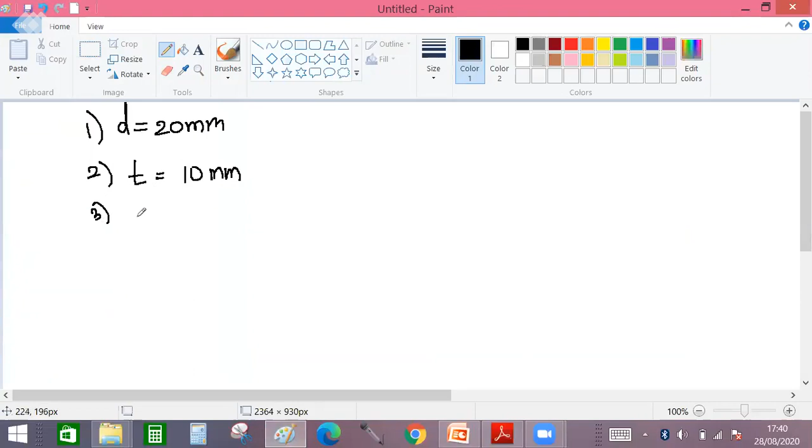So the third given is FUB equal to 400 MPa. Why is it so? The grade of the bolt is 4.6 grade, that's why we have taken it as 400.

At 50 mm pitch, the pitch given is 50 mm. Now here in the problem, pitch is given to you as 50 mm. If it is not given, how it is assumed, or sometimes we have to calculate it, will be clarified after certain problems. So here the pitch is given as 50 mm, so the next given is pitch equal to 50 mm.

Then the next one is to calculate the efficiency of the joint, with Fe 410 grade of plate. This plate that you are joining has grade 410, so FU, that is the ultimate stress of the plates being connected, is 410. So the next given is FU equal to 410 MPa.

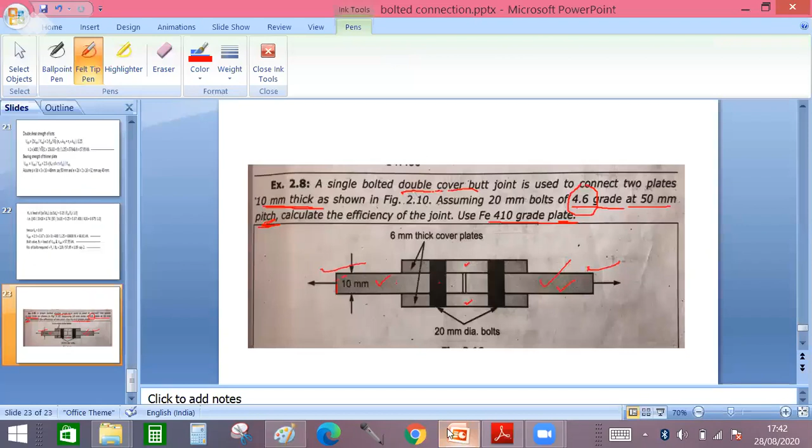Okay, what do we have to calculate? Efficiency of the joint. Any more? See here in the diagram, it is shown the thickness of cover plate is 6 mm. This is very important.

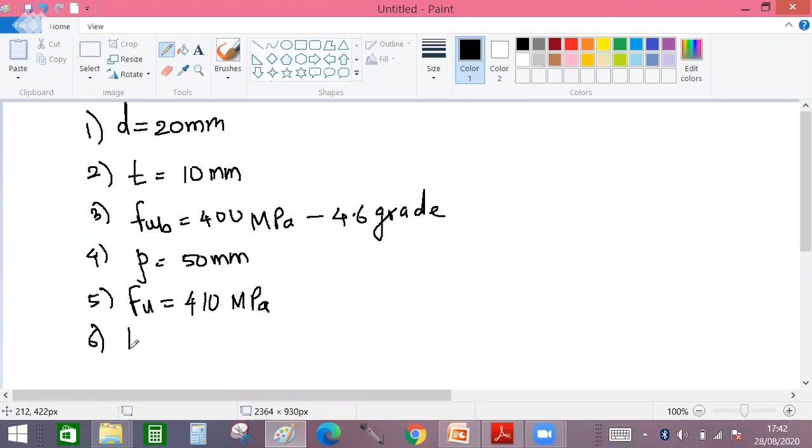How it is, I will explain later on with the steps. Thickness of the cover plate is 6 mm. The member carrying force, here it is 10 mm thick, so the member joining has a minimum thickness of 10 mm. And the cover plates have 6 mm each, there are two cover plates having 6 mm thickness. So the next given is thickness of cover plate is 6 mm, and there are two such cover plates.

Because it is a double cover, thickness of cover plate is 6 mm, two cover plates are there. So this is overall about the given problem. This is the first plate, this is the second plate, connected with bolts of 20 mm diameter using two cover plates having 6 mm thickness each, with the help of 4.6 grade bolts at a pitch of 50 mm.

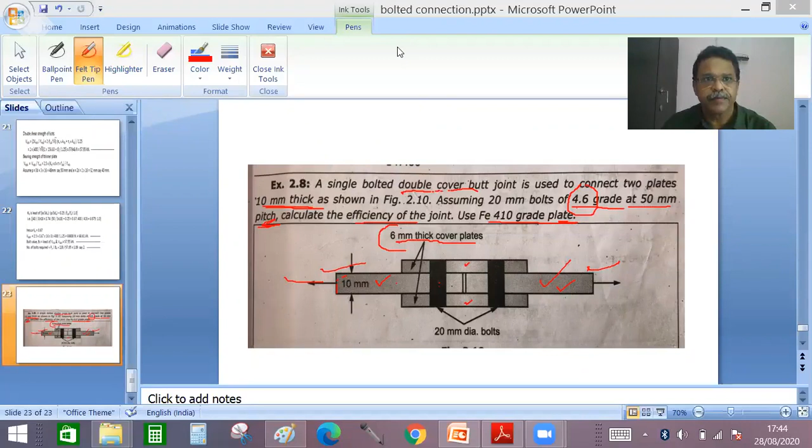These are the givens. D is equal to 20 mm, T is equal to 10 mm, FUB is 400, cover plates 6 mm thickness each, FU 410.

Okay, now let's start with the solution of the problem.

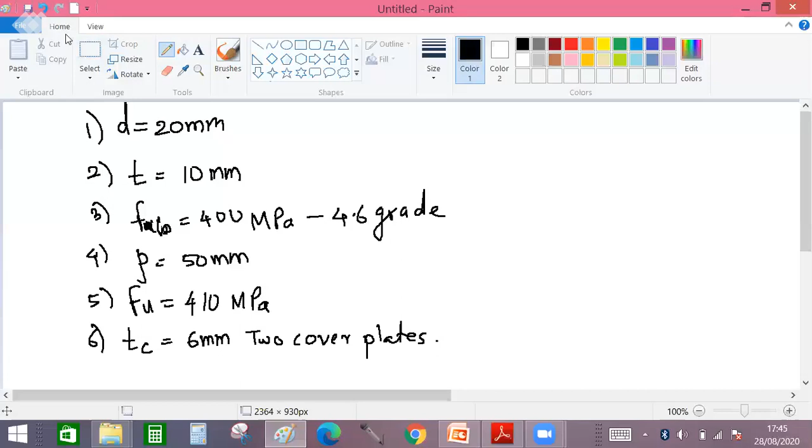So what is the strength of joint? In yesterday's lecture we completed the strength of joint. Let me summarize. The joint consists of two plates. This is the first plate, and this is the second plate, and there will be the bolt.

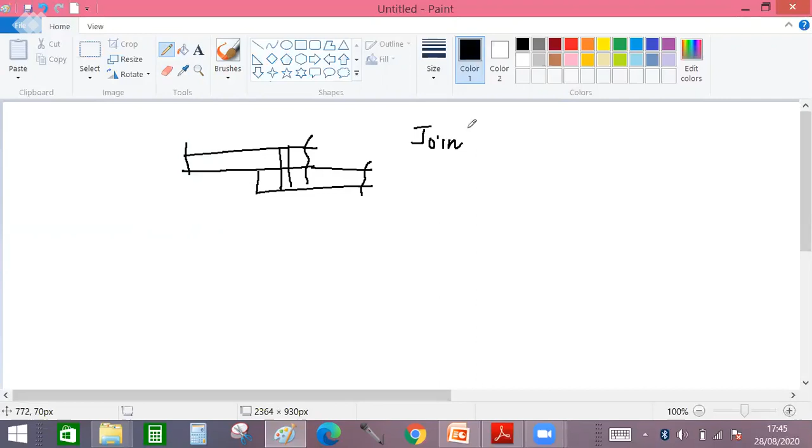So the joint has two main constituents: first is bolt and second is plates. So the joint will fail either by failure of bolt or by failure of plate. Meaning this bolt may fail, or this one plate may fail. Any one can happen.

Which will happen? Whichever is weak, that will happen. So we have to calculate which is the weak one, either bolt is weak or plate is weak. So considering the bolt, we have to calculate first the value of bolt, that is VDSB.

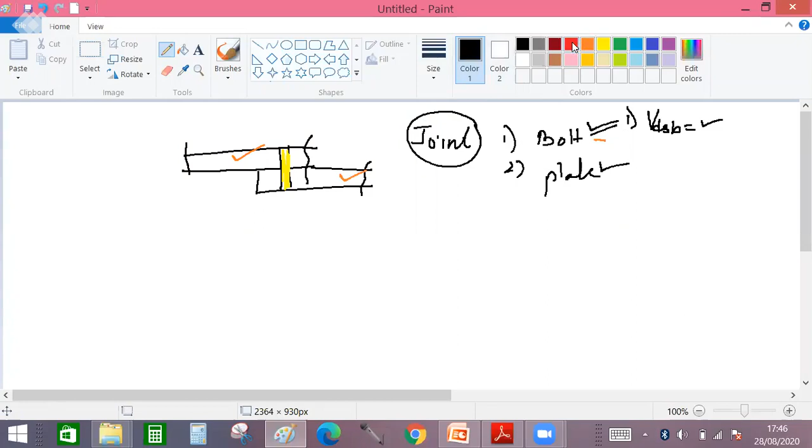At how much load it will fail in horizontal shear plane. Here it is, this is called the shear plane. Due to this force and this force, this bolt will fail at this plane, and that is called shear failure, and its strength is VDSB. So we have to calculate VDSB first.

Then the second one, that is VDPB. That is, the bolt will fail either in vertical plane like this. I will show by another color. Here it is, in vertical plane.

So only the part of the single plate can fail here. So this is the failure of bearing, that is VDPB. So the bolt may fail either in shear horizontally or in bearing vertically along one of the planes in the plate. So these are the two possibilities of failure of bolt.

So to keep the joint intact without failure, you should not allow either of these failures of bolt. Meaning you should not place the load more than the capacity of the bolt, to keep the joint intact without failure.

Now the second one, that is the plate, third one, that is TDN or TDG, doesn't matter. So you have to calculate the strength of plate. These three parts we covered yesterday along with the formula. So calculate these three parts of this joint, then you will realize what is the strength of the joint.

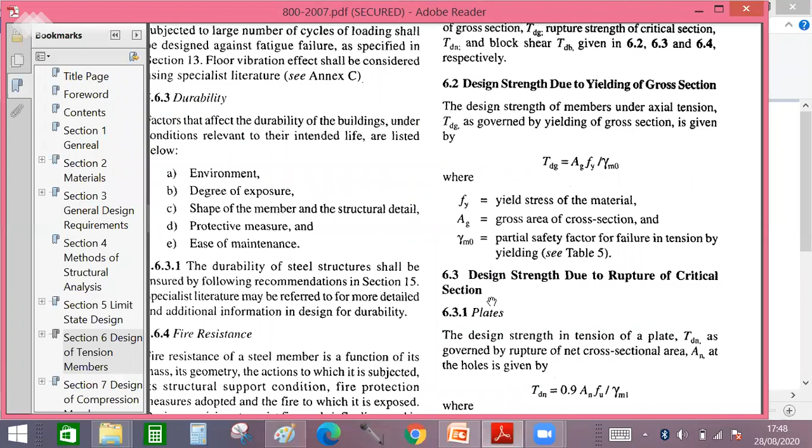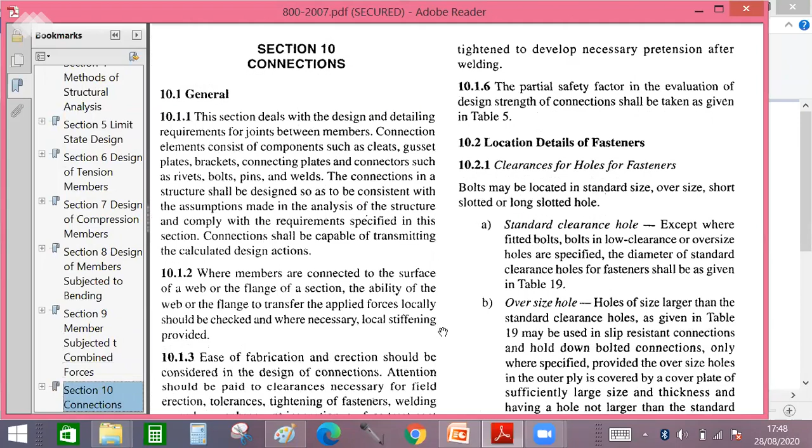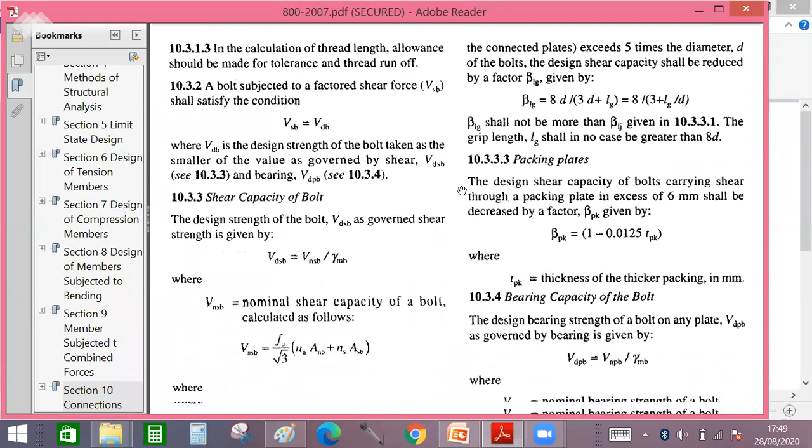Here it is, the connection to be taken. Okay, bearing capacity of the bolt. Here it is. Bearing capacity of the bolt, VDPB.

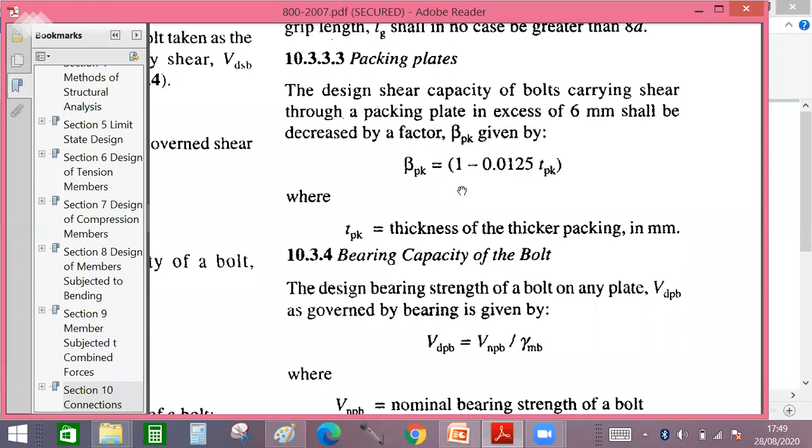Look carefully, it is very important. Many books have made this mistake, many solutions also have this mistake. I will show you where it is, but what is correct. Suppose you are referring to 10 solutions, out of that 6 solutions have taken it correctly, one or two solutions have taken it wrong about the thickness. I will show you somewhere, see here.

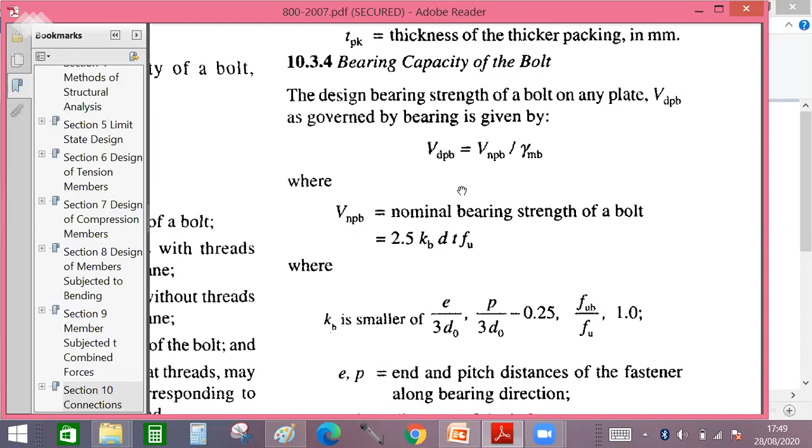Here it is, 2.5 kb d t Fu, that is the formula we are using.

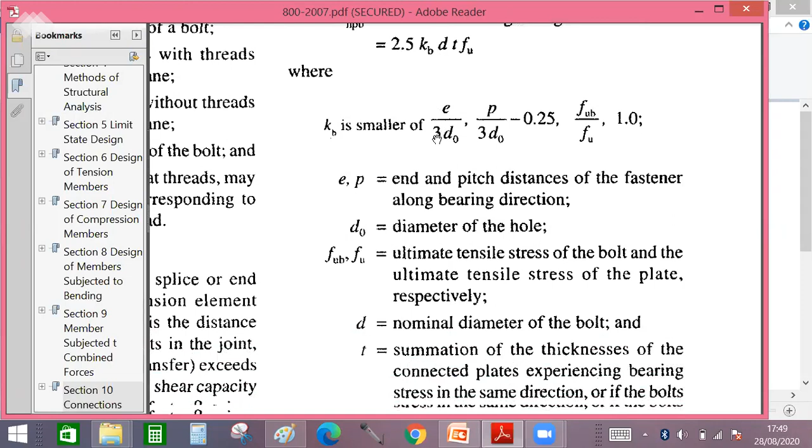Now what is T? Here it is: T is the summation and addition of thicknesses of the connected plates experiencing bearing stress in the same direction.

Same direction means, in one direction, however many plates are stretching, that's the same direction. Suppose some plates are stretching towards the rightward direction, some plates are stretching towards the leftward direction. So if you consider the rightward direction, then same direction means the summation of thickness of plates which are stretched along the rightward direction, you have to take the addition of all of those. This is what the clause says.

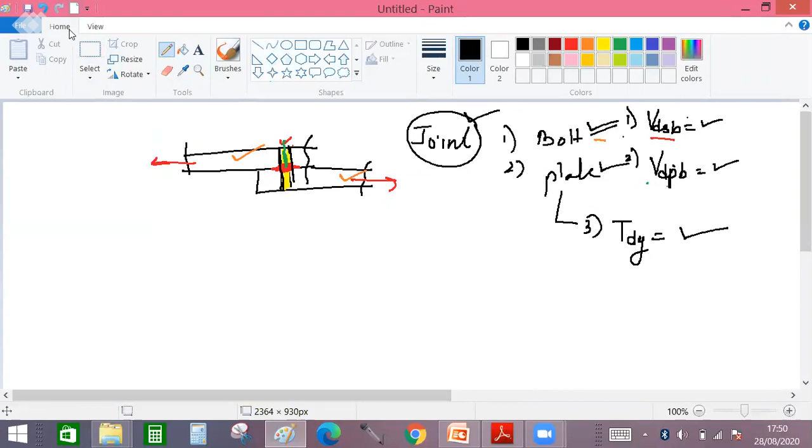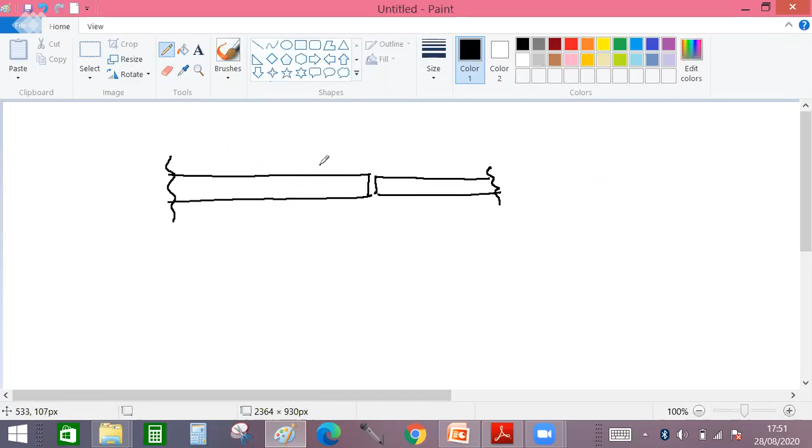Having 10 mm thickness, in front of that, another plate of the same thickness, 10 mm, is placed. Here it is. And to connect these two plates, this is the first cover plate we have taken.

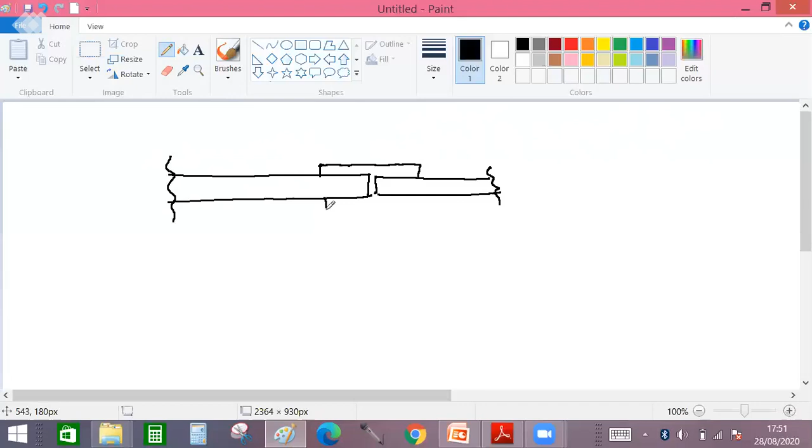This is the first cover plate. And here is the second cover plate. So there are two cover plates, the first one and the second one.

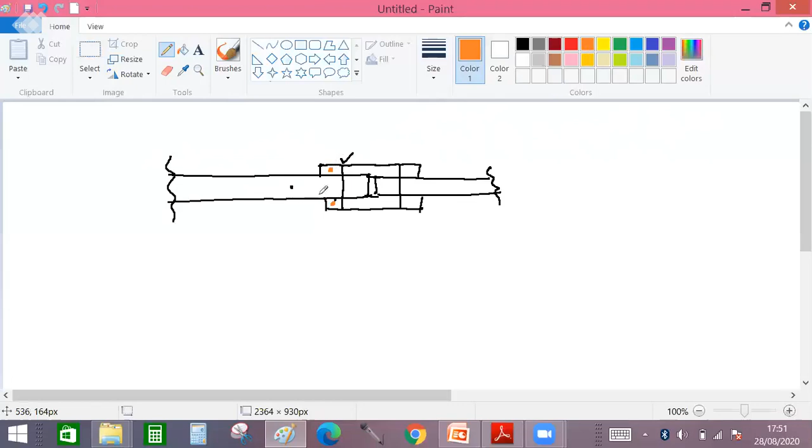And one bolt is provided over here and another bolt is provided over here. So this bolt connects these two plates along with this plate. I will show by some color. This one part is connected to this plate, and this one part is connected with another plate. This is done by this one bolt, and this is done by this one plate bolt.

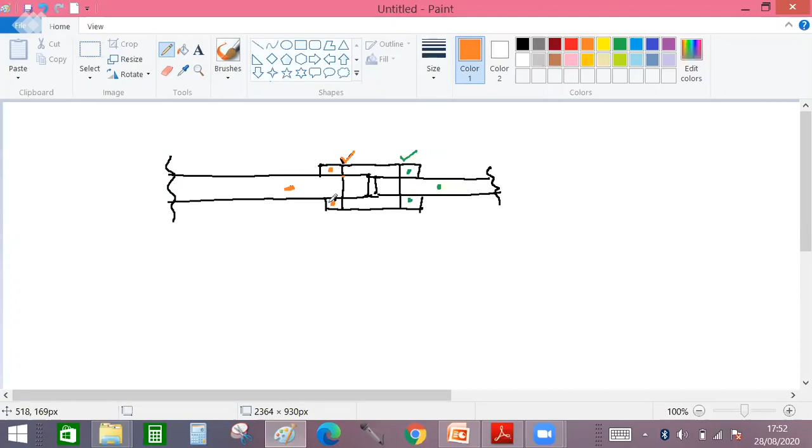So this bolt connects these three parts, and the joint will happen. Now what is the direction of force? Direction of force is over here in this plate and here in this plate. So it is stretching towards the right, and this is towards the left.

Now think about this bolt. Here it is, the bolt. So in how many planes will it fail now? This is the bolt, here it is going to be stretched, so it will fail at this one and this one. So there are two planes going to fail, the first one and the second one.

I will show after failure how it looks like. See here, this is the cover plate, the upside cover plate.

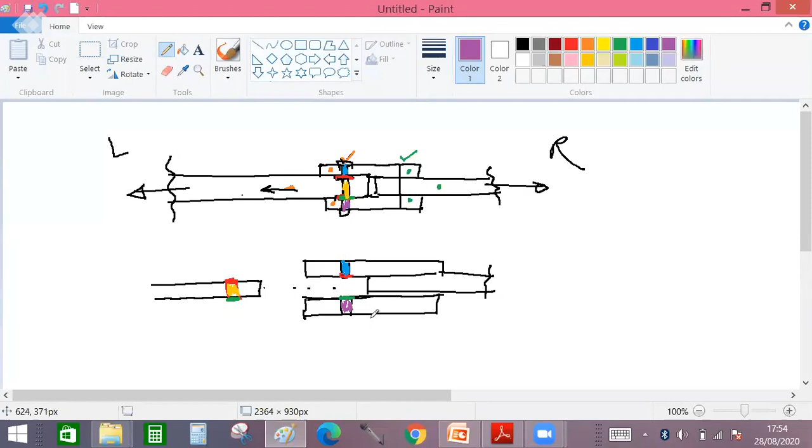So this is the first part. I will show by different colors now. Here it is, the first part, it remains over here. This is the second part, it remains over here. This is the third part, it remains over here. So the bolt is sheared at the first plane and the second plane.

So NN is equal to 2 because it sheared at two planes. Suppose only one cover plate is there. Then the failure will be only at one plane. Is it? I will show it afterwards.

So for double cover butt joint, it means plates are placed in front of each other. Lap means the plates are overlapped. This is lap and this is butt. So these are the two plates joined by a butt joint with the help of two cover plates.

So the failure is at twice, so NN is equal to 2. Okay, so NN is equal to 2. We have to take this in the formula, that is VDSB. So VDSB is equal to FUB upon root 3, NN into ANB, into 1 upon gamma MB, isn't it?

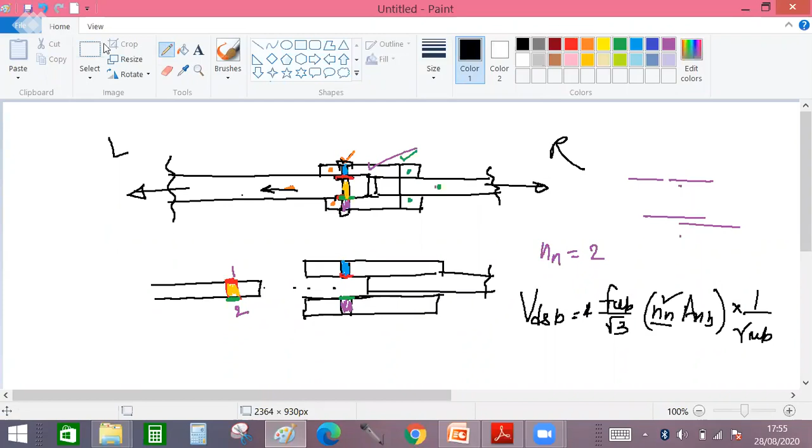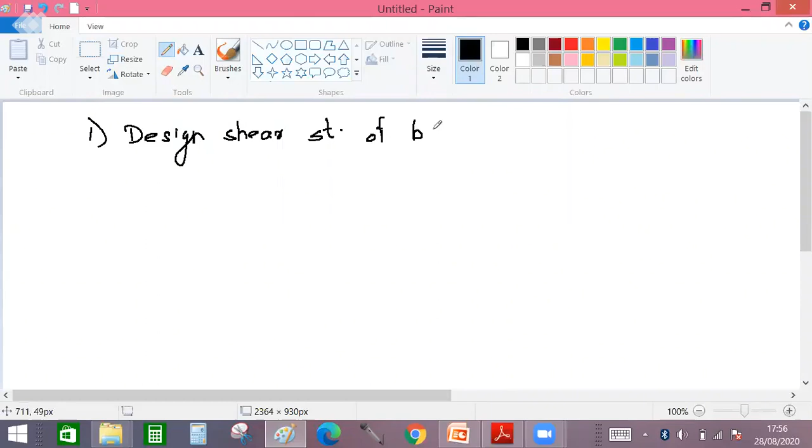Come on now, we will calculate VDSB. So the first step, design shear strength of bolt. Remember, it is a bolt, and design means VDSB.

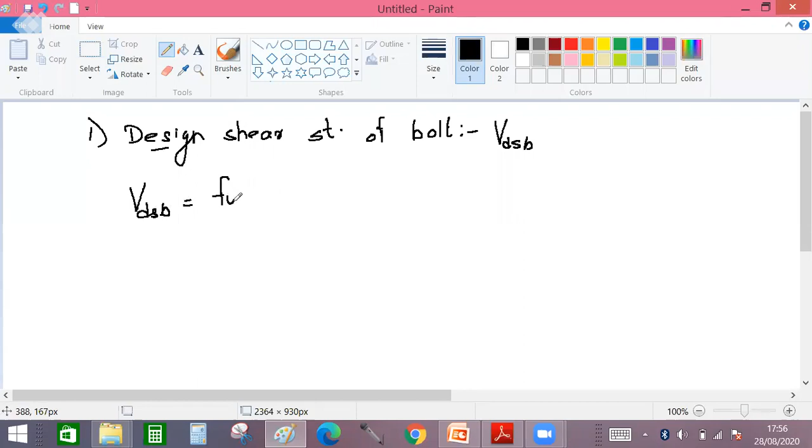Agar nominal hota to yahan pe VNSB hota. So the VDSB is equal to, formula is FUB upon root 3 into bracket NN into ANB bracket complete, 1 upon gamma MB. Is it? So here it is.

FUB given to you is 400 divided by root 3. NN is equal to 2. And what about ANB? So yahan pe ANB nikalta hoon.

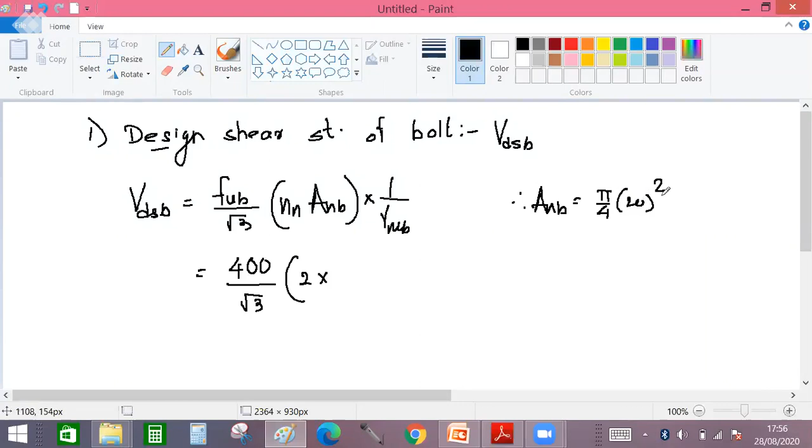What is the diameter of bolt, that given pi by 4, 20 square? Diameter of bolt is 20, no? Confirm it, yes it is 20. And the multiplying factor is 0.78.

Dekho calculate karke kitna aa raha hai. You calculate, it will be near about 245. Has someone calculated? Are you calculating? 245.04, yes. So it is taken as 245 mm square rounded, or you can take it as it is, 245.04. Doesn't matter, so it is rounded somewhere 245 or 245.04.

So different authors take it differently. So 245 mm square is the net. Net means it will fail in threads. So net area, so 245, to yahan pe aa jayega 245 into 1 upon 1.25.

So here it is, if you calculate that value as it is in shear, but it is a double shear, so it comes to be 90.53 into 10 raised to 3 newtons.

So the answer is in Newton, so it will be 90.53. 10 raised to 3 nikaal doge to ye kilo newton ban jayega. So this is the first value of design shear strength of bolt.

Means what? The bolt will fail in shear if load exceeds 90.53. To aapko kya karna hoga, bolt fail na hone ke liye aap 90.53 se zyada load place nahi karoge. Yani according to this first condition of shear, you cannot place load more than 90.53. So it will take 90 as far as shear is concerned.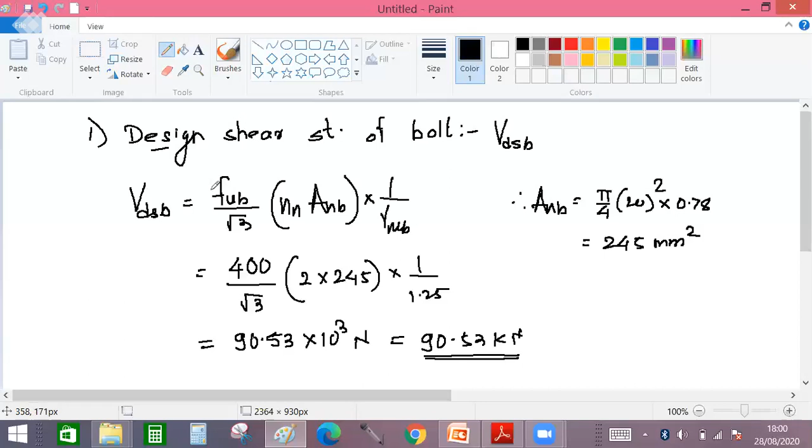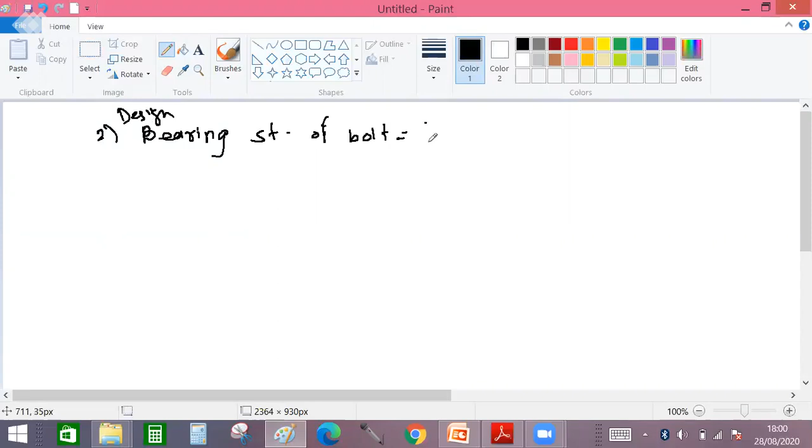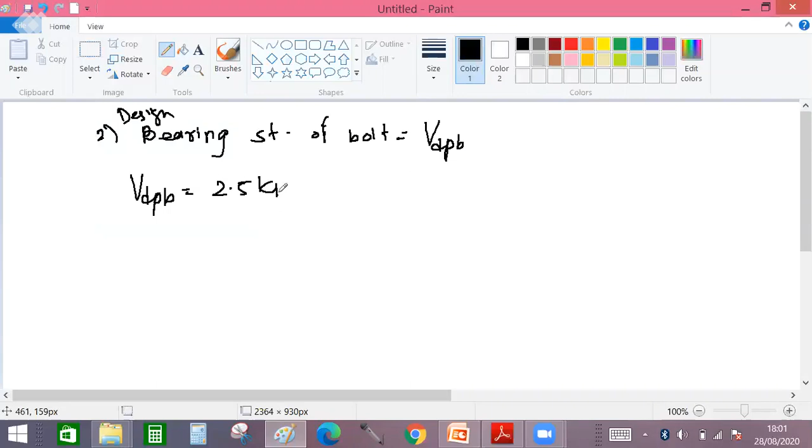So here it is, now the second step, that is bearing strength of design bearing strength of bolt. Ye design ka matlab hua VDPB. Nominal hota to NPB hota. To VDPB is equal to, formula hai 2.5 kb into D into T into FU upon gamma M1 or MB, which one, anyone you can put.

So FU, now we are talking about joint, so here it is FU should be taken. If you are talking about the bolt only, then you have to take FUB. So VDPB, now diameter is 20.

Now thickness ke baare mein clause use karna hai, kis tarah se use karna hai bataunga. Pehle KB ka value nikaal deta hoon. Theek hai, to KB ka value hai, first value E upon 3D0, isn't it? E means edge distance. So edge distance either you have to assume, because in the problem it is not given. Now what is the value of E?

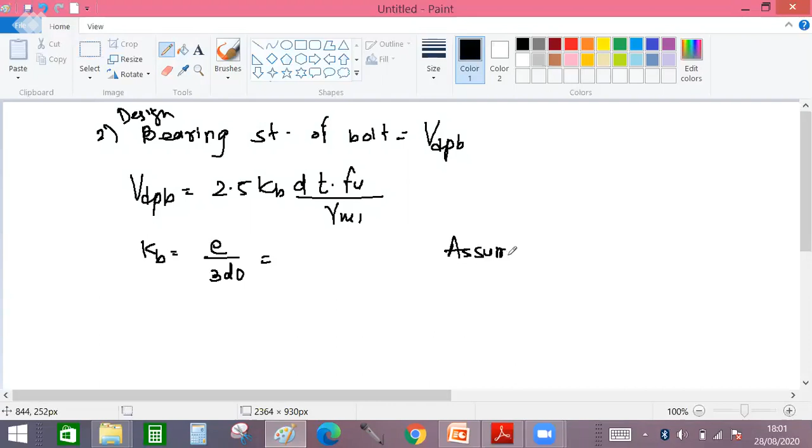So assume value of E is equal to, according to IS code, 1.5 D0. So 1.5 times diameter of bolt, which is 20. The diameter of hole means D0, and that should be taken 2 mm excess. So 20 mm diameter bolt means 22 mm diameter of hole. So it will be 22, and it comes out to be 33 mm.

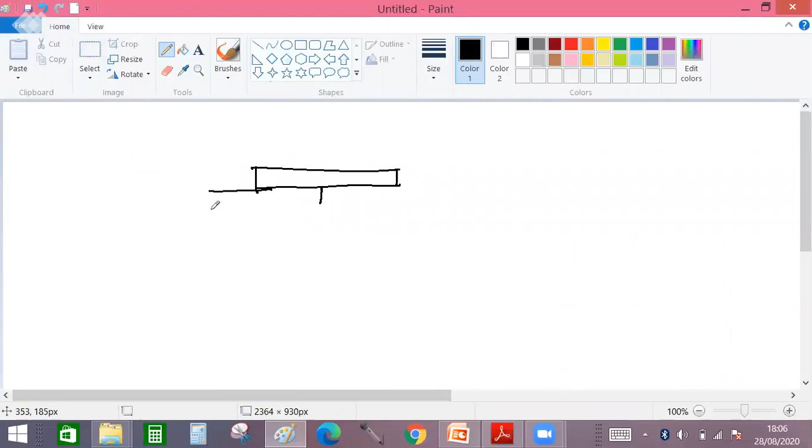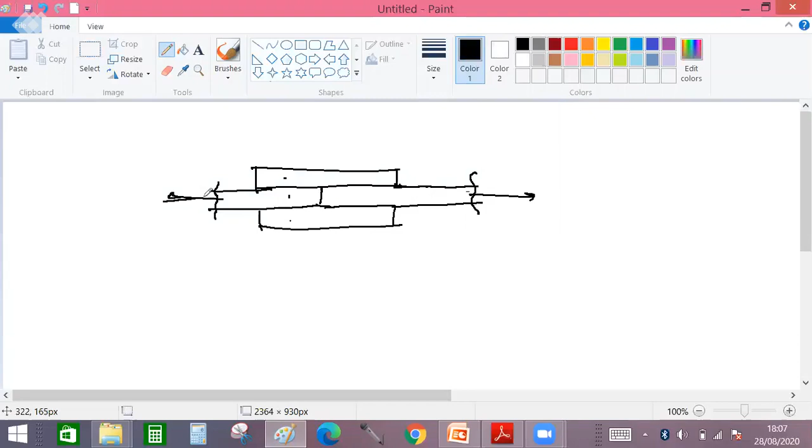ये है सेकंड प्लेट, ये इधर खींचे। तो क्या बोल रहा है समेशन में, द समेशन ऑफ थिकनेसेस ऑफ द प्लेट्स इन सेम डायरेक्शन। अब इस 3 प्लेट में, 1 2 3, इसमें से कौन से 2 प्लेट एक डायरेक्शन में खींचे जा रहे हैं और कौन सा एक प्लेट अलग डायरेक्शन में खींचा जा रहा है। देखिए अब इस प्लेट को इस डायरेक्शन में फोर्स है, राइट। सो दिस प्लेट इज गोइंग टू स्ट्रेच इन दिस डायरेक्शन, हियर इट इज इन दिस डायरेक्शन।

नाउ this is connected with the bolts like this, now the second plate is stretched exactly in opposite direction। तो ये प्लेट इधर खींचे जा रहा है, ये प्लेट थ्रू दिस बोल्ट ये इस प्लेट को इस डायरेक्शन में खींचेगा। सो दिस पार्ट मैं शैडो कर लेता हूं। ये देखिए, ये पीला वाला पार्ट

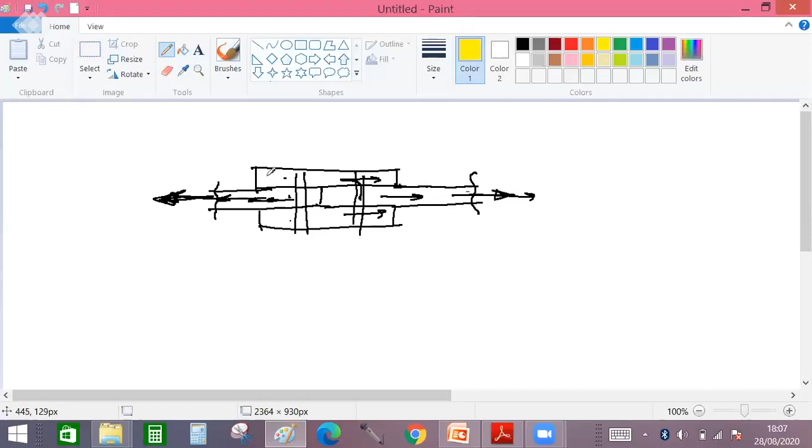इस डायरेक्शन में खींचा जाएगा और ये पिंक वाला पार्ट इस डायरेक्शन में खींचा जाएगा। यानी दिस वन पार्ट, ये वाला, इस वाला, ये प्लेट का इधर खींचा जाएगा। तो मैं दूसरा डायग्राम निकाल के दिखाता हूँ। ये देख,

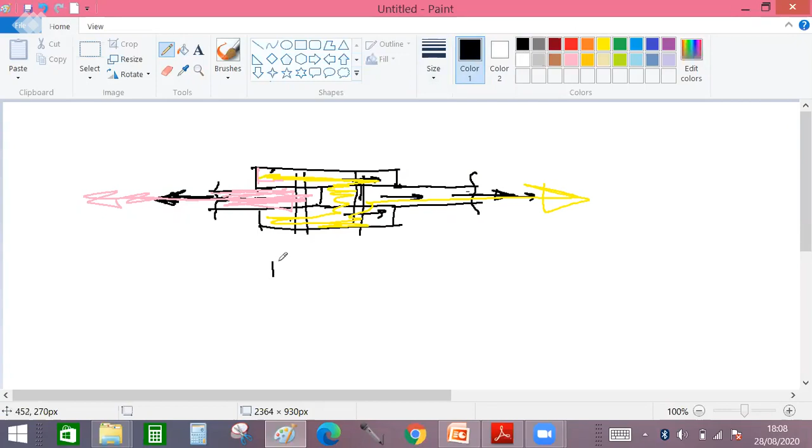इधर जा, दिस प्लेट वन, दिस प्लेट एंड दिस प्लेट, ये जो तीन प्लेट्स है, एक दो तीन, इस डायरेक्शन में खींचे जा रहा है। और ये जो है, ये बीच वाला प्लेट इस डायरेक्शन में खींचा जा रहा है। ठीक है ना? ओके. सो दिस वन इज द टू प्लेट्स, isn't it? This one is the two plates. There are two members we are connecting with the bolt.

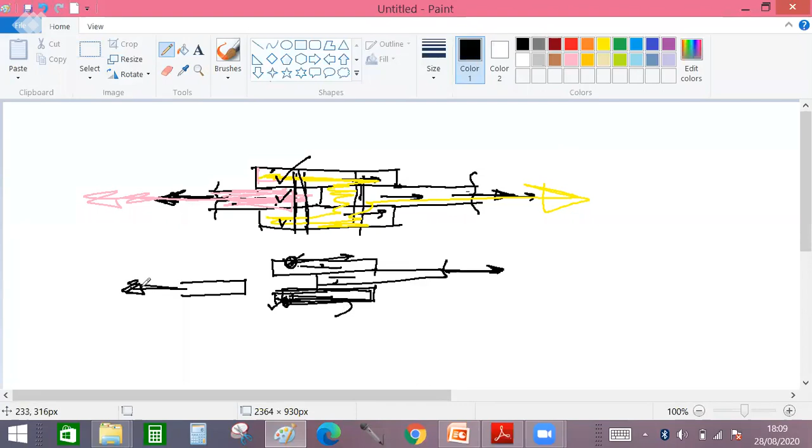बोल्ट के साथ कौन कौन सा कनेक्ट कर रहे हो आप? इस बोल्ट के साथ एक प्लेट, दो प्लेट, तीन प्लेट कनेक्ट कर रहे हो। तो इस तीन प्लेट में से ये दो प्लेट इस डायरेक्शन में खींचे जा रहे हैं और ये प्लेट इस डायरेक्शन में खींचा जा रहा है। तो इसका थिकनेस है 6 mm, इसका थिकनेस है 6 mm, इसका थिकनेस है 10 mm। फिर से एक बार दिखाता हूं मैं आपको, कोई प्रॉब्लम नहीं।

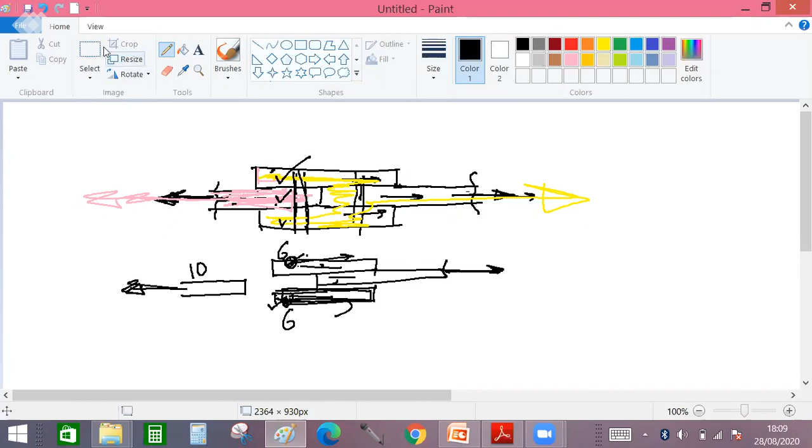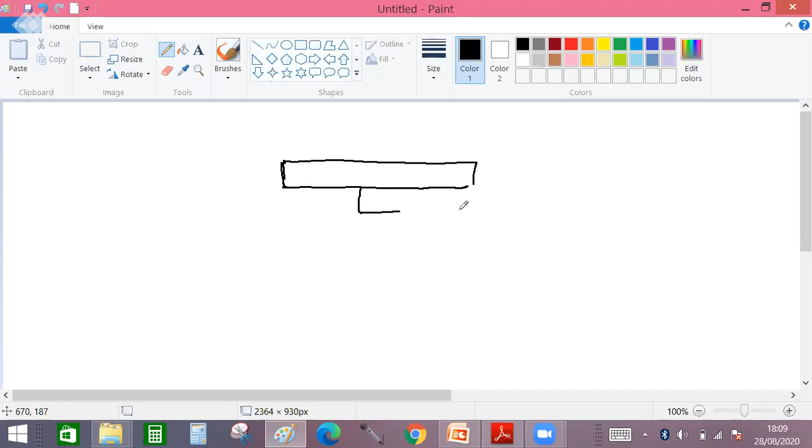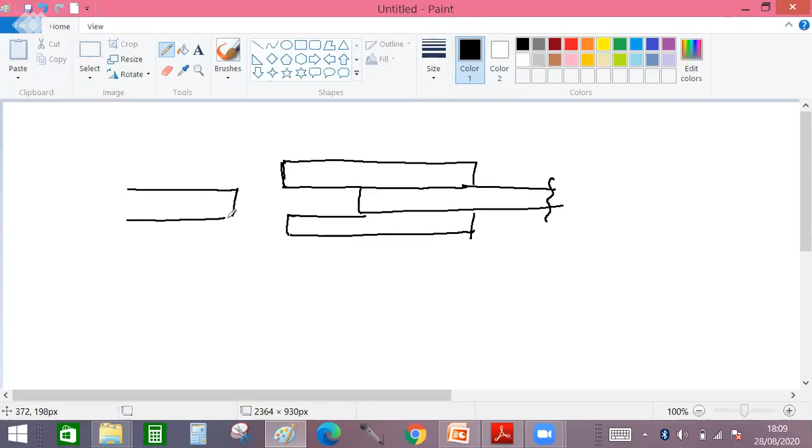देखिए, ये ऊपर वाला प्लेट, दिस इज द मेन प्लेट, ये नीचे वाला प्लेट और ये मेन प्लेट अनदर वन जो यहाँ पे था, राइट। और ये है बोल्ट आपका।

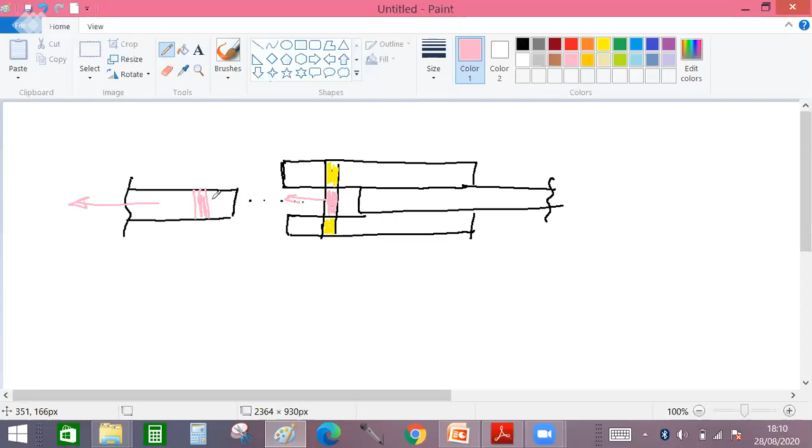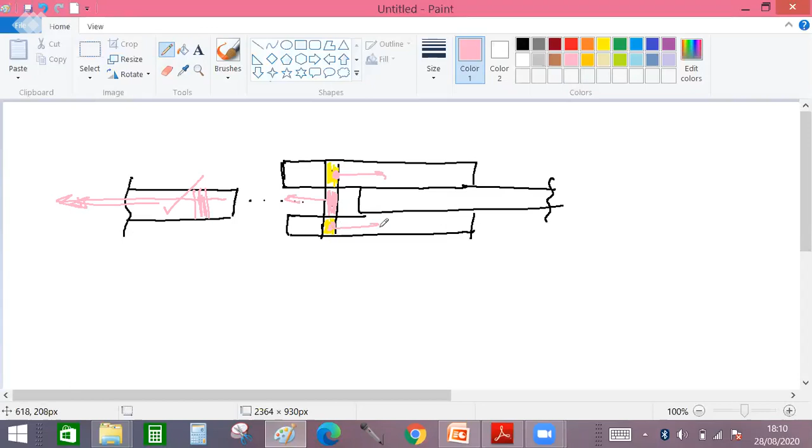तो दिस बोल्ट passes through the three plates। एक येलो वाला, ये येलो वाला, दो कवर प्लेट्स। और ये जो पार्ट है इस बोल्ट में है, इस प्लेट में है। तो दिस वन पार्ट is pulled in this direction along with this plate। So this part of the bolt stretched in left direction along with this plate, and this one part of the bolt get stretched with the another direction, इस direction में, along with this force।

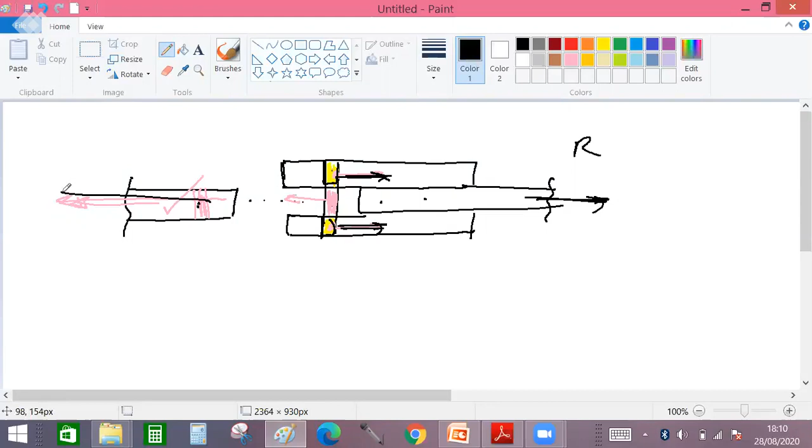Can you imagine now? This one force transferred to these plates and stretched towards the right side। This is the plate। आप इस प्लेट के बजाय ये भी कर सकते हो, इस बोर्ड को ये दो लीजिए और ये हिला लीजिए, doesn't matter। तो बात ऐसी है, बोर्ड का ये दो पार्ट राइट में खींचे जा रहे हैं along with this part, और ये सेंटर वाली जो प्लेट थी ये डायरेक्शन में जा रहा है। तो राइट में जाने वाले ये 6 mm और लेफ्ट में जाने वाला ये 10 mm है।

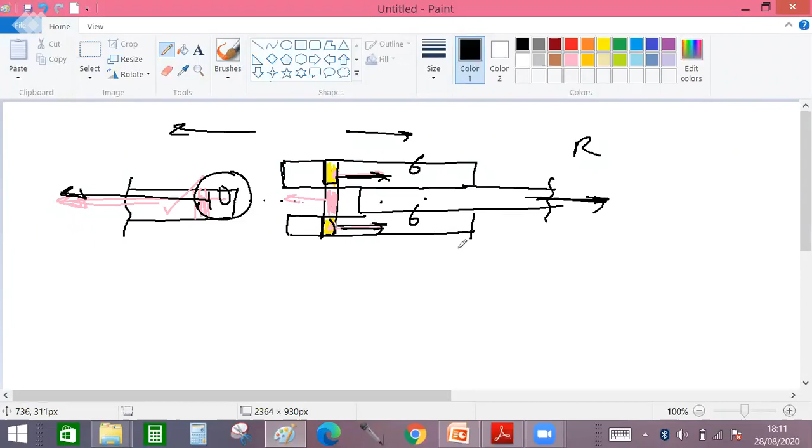तो एक डायरेक्शन में समेशन करने को बोल रहा है। तो इस डायरेक्शन में समेशन हुआ 6 + 6 = 12 mm। इस डायरेक्शन का समेशन हुआ 10 mm। सो विच वन इज द स्मॉल वन? द स्मॉल वन इज 10 mm। समेशन का 12 हुआ, एक 10, इधर का समेशन, इधर का समेशन 6 + 6 = 12 हुआ, इधर का समेशन 10 mm हुआ।

तो दोनों का एडिशन करने के बाद इधर का 12, इधर का 10। तो विच इज द मिनिमम? सो थिकनेस शुड बी टेकन एज 10 mm। ध्यान से सुनिए, ठीक है।

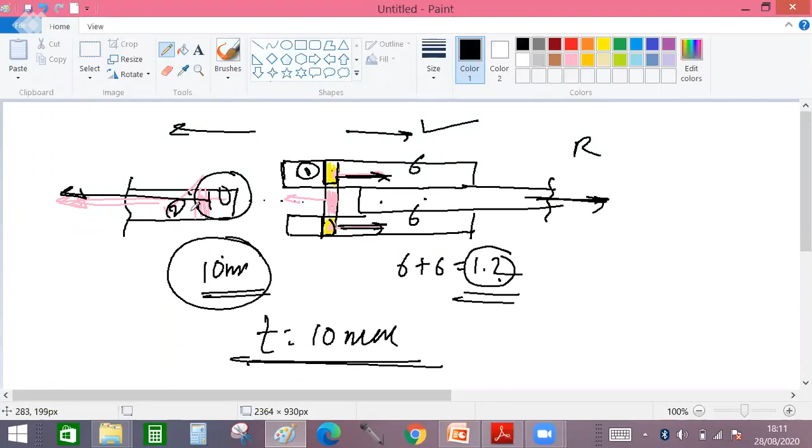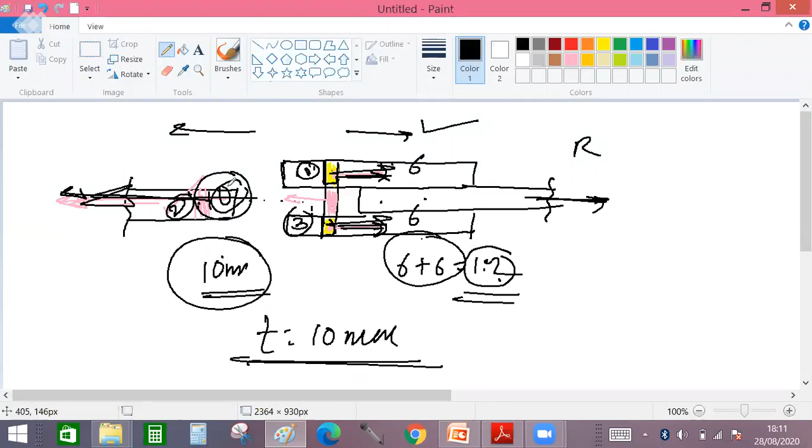तो जब तीन प्लेट्स कनेक्ट करते हो, जैसे यहाँ पे एक दो तीन में से दो प्लेट राइट डायरेक्शन में खींचे जा रहे हैं। सो सेम डायरेक्शन का एडिशन 6 + 6 = 12, ये डायरेक्शन में खींचे जा रहा है। इसका एडिशन ओनली एक ही प्लेट है 10 mm का। तो एक डायरेक्शन में 10 mm, दूसरे डायरेक्शन में 12 mm। तो दोनों में से जो मिनिमम है दैट इज 10 mm। सो थिकनेस शुड बी टेकन एज 10 mm। ओके, सो हियर इट इज।

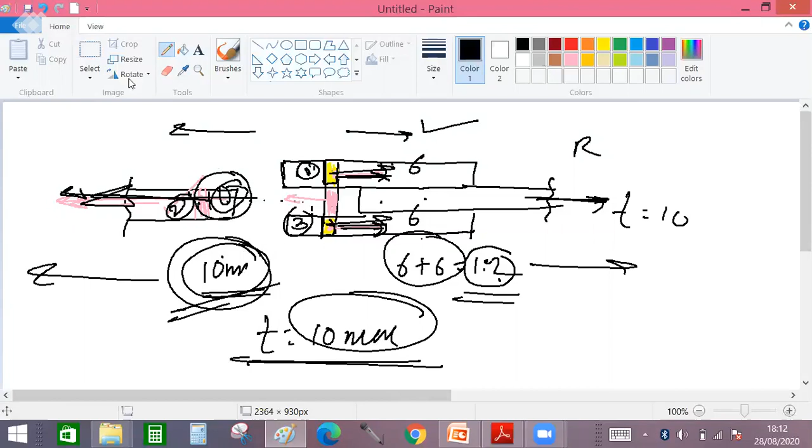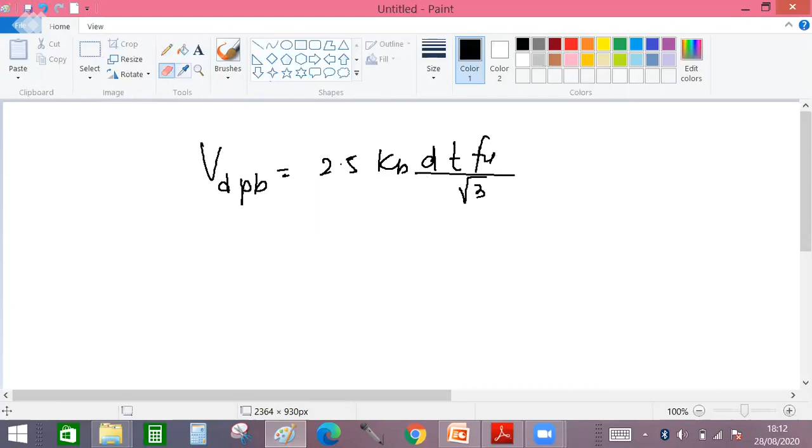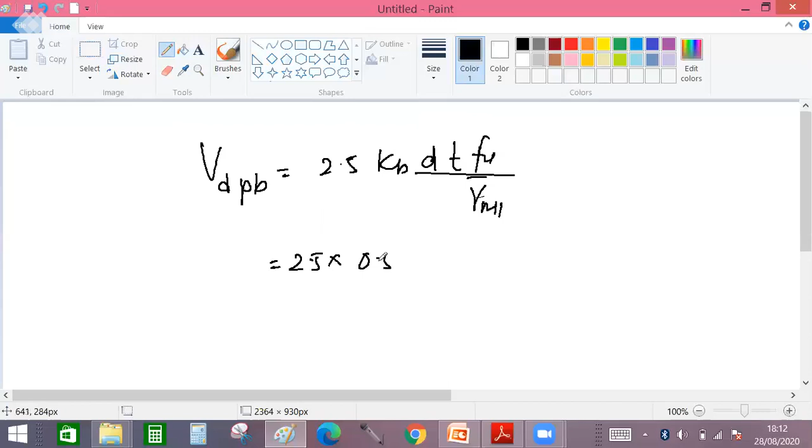तो नेक्स्ट पार्ट जो आपका फॉर्मूला तो जो मैंने अभी लिखा था उसमें लिखता हूं। सो VDPB is equal to 2.5 kb into D into T into Fu upon gamma mb। So it is gamma mb, M1 भी लिख सकते। सो 2.5 as it is, केबी का वैल्यू 0.5 आया था, डायमीटर 20 mm है, थिकनेस अभी अभी डिस्कस हुआ 10।